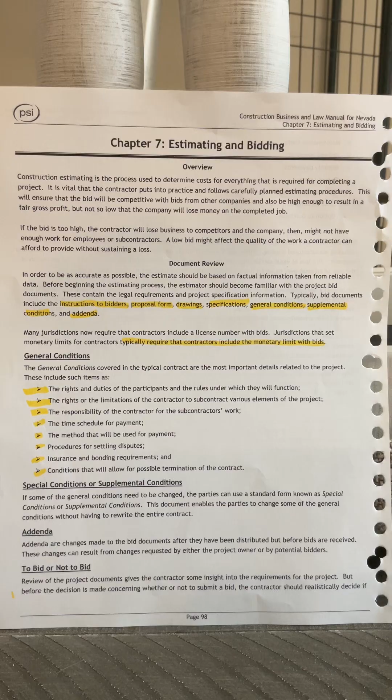To bid or not to bid. Review of the project documents gives the contractor some insight into requirements for the project, but before deciding whether or not to submit a bid, the contractor should realistically decide if the project would be profitable for the company.

To make this decision, the contractor needs to check that the size and complexity of the project is within the range of the company's experience and capabilities, that the project is compatible with the type of work the company typically does, and that the company has available resources, funds, equipment, subcontractors, material, and personnel to complete the project within the time frame noted in the documents.

If these requirements could be met, then the contractor, or designated estimator, would proceed with the estimating process.

Estimating procedures. Forecasting accurate costs for all of a project's requirements is, at best, a time-consuming and imperfect task. The contractor should establish a system for the company in which the same procedures are followed for each estimate. Having this system in place gives the estimator more confidence that nothing in the estimate has been overlooked or figured incorrectly.

Technology is helping increase the accuracy of the estimating process with specialized software programs for estimators, along with standardized national and regional cost indexes. Bid documents, including drawings and project specifications, are typically organized in accordance with the industry standard CSI format.

CSI format offers contractors an accepted method for organizing their estimates and bid tabulations. It is often used for job cost coding to provide an easy and functional transition of the bid estimate to the working project budget.

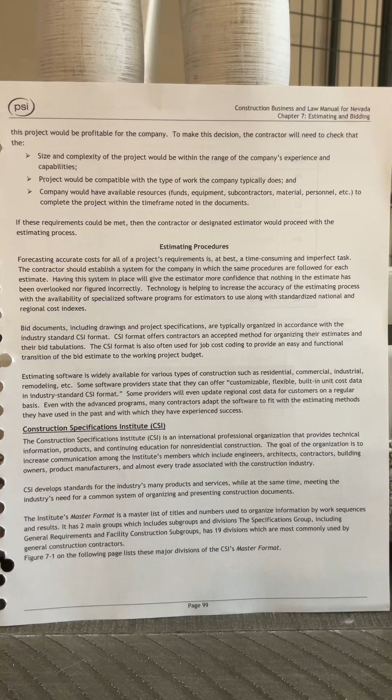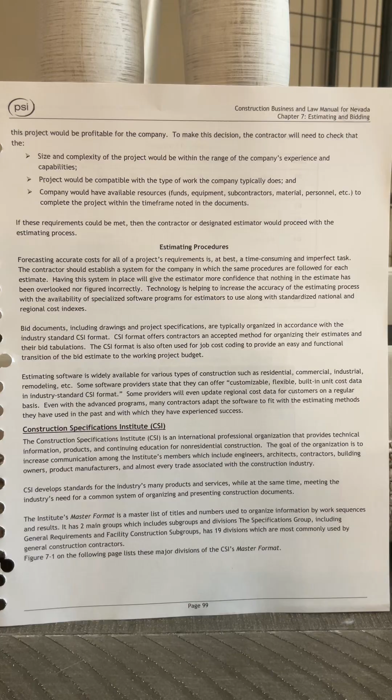CSI develops standards for the industry's many products and services, while also meeting the industry's need for a common system of organizing and presenting construction documents. The Institute's master format is a master list of titles and numbers used to organize information by work sequences and results. It has two main groups, which include subgroups and divisions. The specification group, including general requirements and facility construction subgroups, has 19 divisions commonly used by general construction contractors. Figure 7.1 on the following page lists these major divisions of the CSI's master format.

Figure 7.1, CSI Master Format Specification Group, General Requirements and Facility Construction Subgroups, 19 divisions. Code Division.

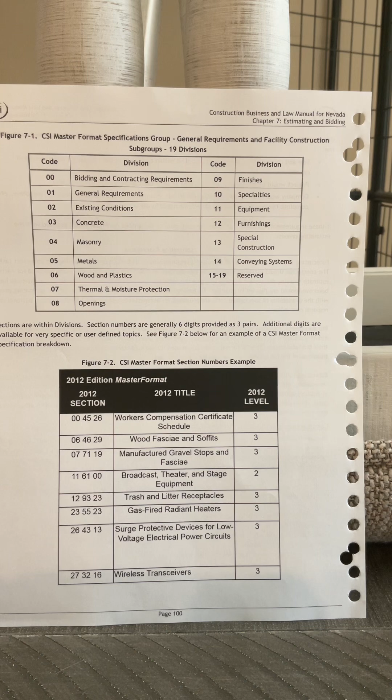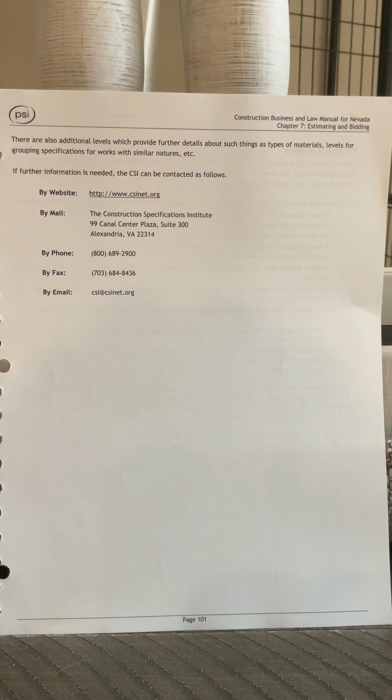Sections are within divisions. Section numbers are generally 6 digits, provided as 3 pairs. Additional digits are available for very specific or user-defined topics. See Figure 7.2 below for an example of a CSI master format specification breakdown. There are also additional levels which provide further details about such things as types of materials and levels for grouping specifications of a similar nature.

If further information is needed, the CSI can be contacted as follows. By website, http://www.csinet.org. By mail, the Construction Specifications Institute, 99 Canal Center Plaza, Suite 300, Alexandria, Virginia, 22314. By phone, 800-689-2900. By email, csi@csinet.org.

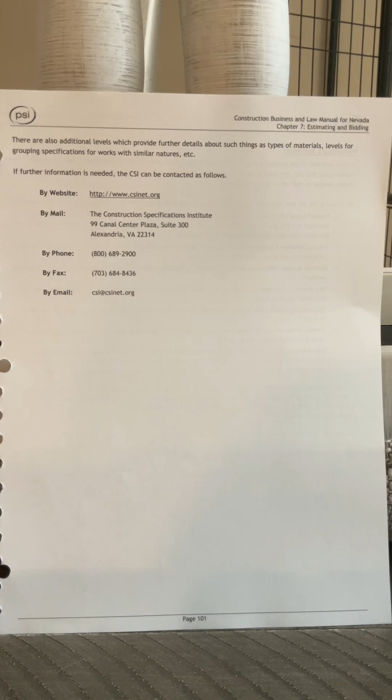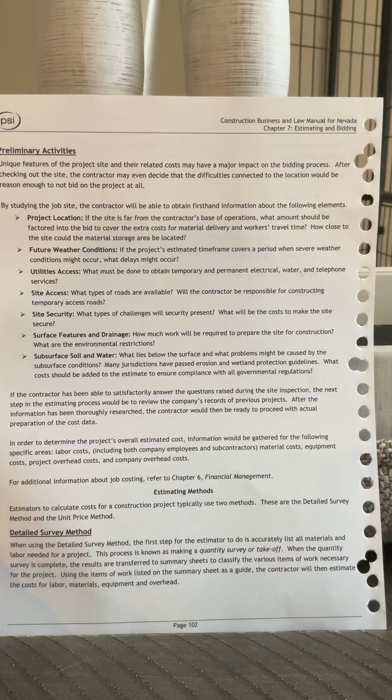Preliminary activities. Unique features of the project site and their related costs may have a major impact on the bidding process. After checking out the site, the contractor may even decide that the difficulties connected to the location would be reason enough to not bid on the project at all. By studying the job site, the contractor will be able to obtain first-hand information about the following elements.

Project location: if the site is far from the contractor's base of operations, what amount should be factored into the bid to cover the extra costs for materials, delivery, and workers' travel time? How close to the site could the material storage area be located?

Future weather conditions: if the project's estimated time frame covers a period when severe weather conditions might occur, what delays might occur? Utilities access: what must be done to obtain temporary and permanent electrical, water, and telephone services? Site access: what types of roads are available? Will the contractor be responsible for constructing temporary access roads? Site security: what types of challenges will security present? What will be the cost of making the site secure?

Surface features and drainage: how much work will be required to prepare the site for construction? What are the environmental restrictions? Subsurface soil and water: what lies below the surface, and what problems might be caused by the subsurface conditions? Many jurisdictions have passed erosion and wetland protection guidelines. What costs should be added to the estimate to ensure compliance with all governmental regulations?

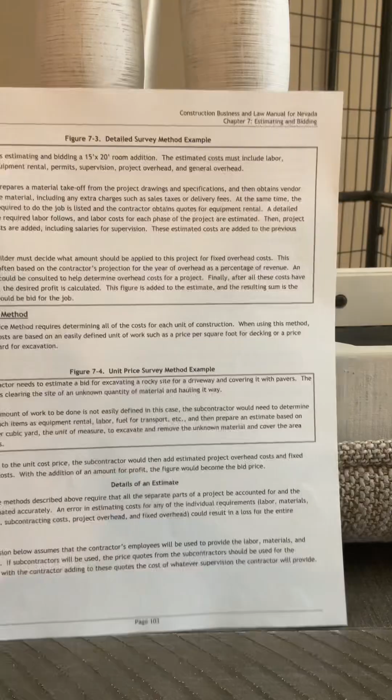Figure 7.3, detailed survey method example.

A contractor is estimating and bidding a 15 by 20 room addition. The estimated cost must include labor, materials, equipment rental, permits, supervision, project overhead, and general overhead.

The builder prepares a material takeoff from the project drawings and specifications, then obtains vendor quotes for the material, including any extra charges such as sales taxes or delivery fees. At the same time, the equipment required to do the job is listed, and the contractor obtains quotes for equipment rental.

A detailed review of the required labor follows, and labor costs for each phase of the project are estimated. Then project overhead costs are added, including salaries for supervision. These estimated costs are added to the previous amount.

Next, the builder must decide what amount should be applied to this project for fixed overhead costs. This estimate is often based on the contractor's projection for the year of overhead as a percentage of revenue. An accountant could be consulted to help determine overhead costs for a project.

Finally, after all these costs have been added, the desired profit is calculated. The figure is added to the estimate, and the resulting sum is the price that would be bid for the job. Unit price method: this method requires determining all of the costs for each unit of construction.

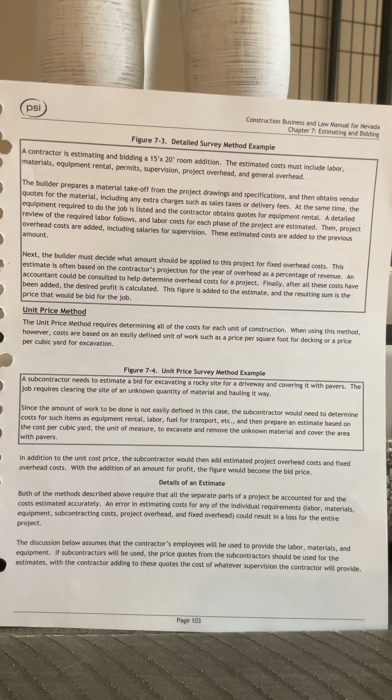The discussion below assumes that the contractor's employees will be used to provide the labor, materials, and equipment. If subcontractors will be used, the price quotes from subcontractors should be used for the estimates, with the contractor adding to these quotes the costs of whatever supervision the contractor will provide.

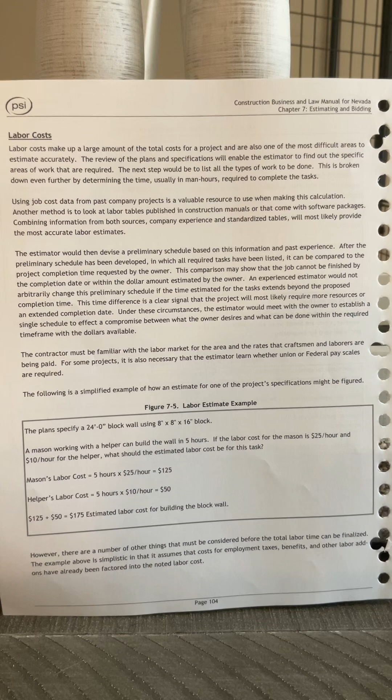Labor costs. Labor costs make up a large amount of the total cost of a project and are also one of the most difficult areas to estimate accurately.

The review of the plans and specifications will enable the estimator to find out the specific areas of work that are required. The next step would be to list all the types of work to be done. This is broken down even further by determining the time, usually in man-hours, required to complete the tasks.

Using job cost data from past company projects is a valuable resource to use when making this calculation. Another method is to look at labor tables published in construction manuals or that come with software packages, combining information from both sources. Company experience and standardized tables will most likely provide the most accurate labor estimates.

The estimator would then devise a preliminary schedule based on this information and past experience. After the preliminary schedule has been developed, in which all required tasks have been listed, it can be compared to the project completion time requested by the owner.

This comparison may show that the job cannot be finished by the completion date or within the dollar amount estimated by the owner. An experienced estimator would not arbitrarily change this preliminary schedule if the time estimated for the tasks extends beyond the proposed completion time. This time difference is a clear signal that the project will most likely require...

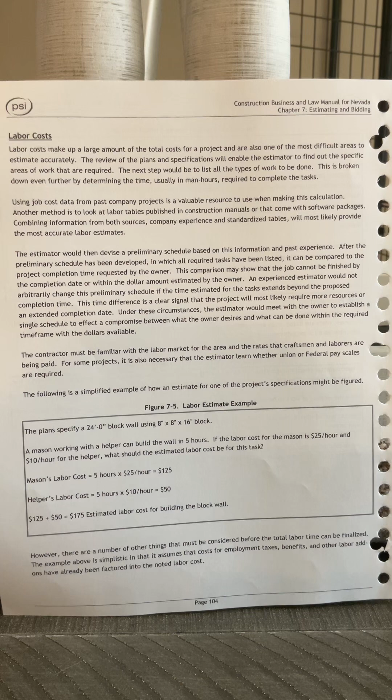The contractor must be familiar with the labor market for the area and the rates that craftsmen and laborers are being paid. For some projects, it is also necessary that the estimator learn whether union or federal pay scales are required. The following is a simplified example of how an estimate for one of the project specifications might be figured.

Figure 7-5, labor estimate example.

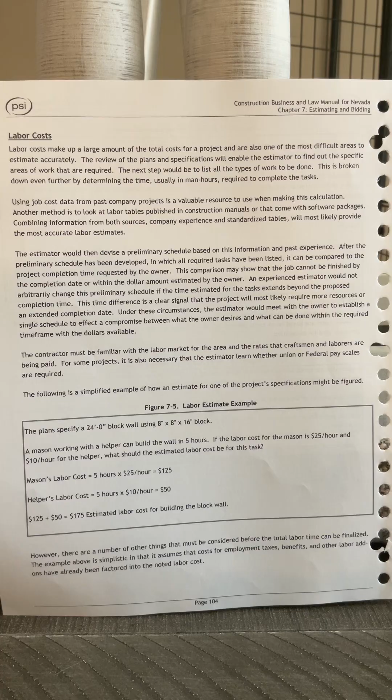The plans specify a 24-foot block wall using 8 by 8 by 16 block. A mason working with a helper can build the wall in 5 hours. If the labor cost for the mason is $25 an hour and $10 an hour for the helper, what should the estimated labor cost be for this task?

Mason labor's cost $125. Helper's labor cost $50. That's $175 estimated labor cost for building the block wall.

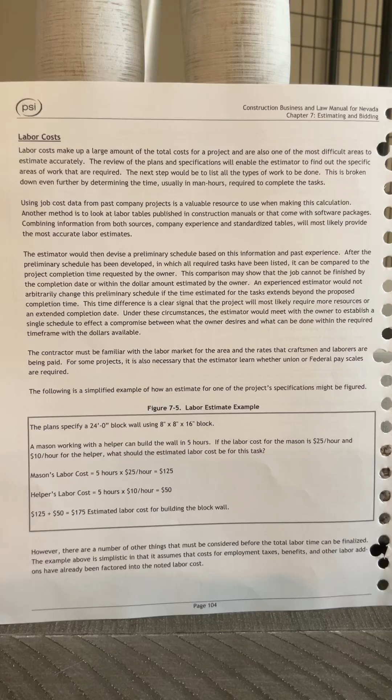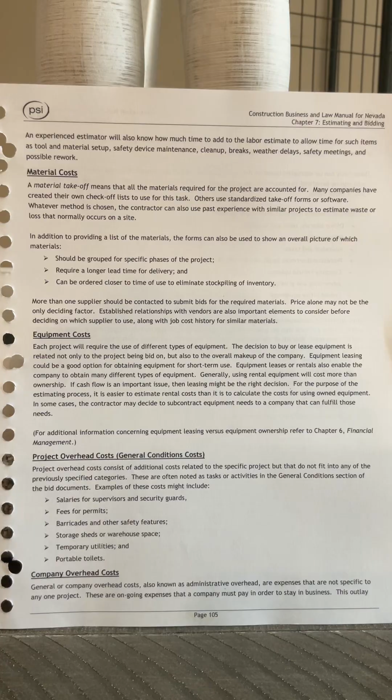However, there are a number of other things that must be considered before the total labor time can be finalized. The example above is simplistic in that it assumes that costs for employment taxes, benefits, and other labor add-ons have already been factored into the noted labor cost. An experienced estimator will also know how much time to add to the labor estimate to allow for items such as tool and material setup, safety device maintenance, cleanup, breaks, weather delays, safety meetings, and possible rework.

Material costs. A material takeoff means that all the materials required for the project are accounted for. Many companies have created their own checkoff lists to use for this task. Others use standardized takeoff forms or software. Whatever method is chosen, the contractor can also use past experience with similar projects to estimate waste or loss that normally occurs on a site.

In addition to providing a list of the materials, the forms can also be used to show an overall picture of how materials should be grouped for specific phases of the project, which require a longer lead time for delivery, and which can be ordered closer to time of use to eliminate stockpiling of inventory.

More than one supplier should be contacted to submit bids for the required materials. Price alone may not be the only deciding factor. Established relationships with vendors are also important elements to consider before deciding on which supplier to use, along with job cost history for similar materials.

Equipment costs. Each project will require the use of different types of equipment. The decision to buy or lease equipment is related not only to the project being bid on, but also to the overall makeup of the company.

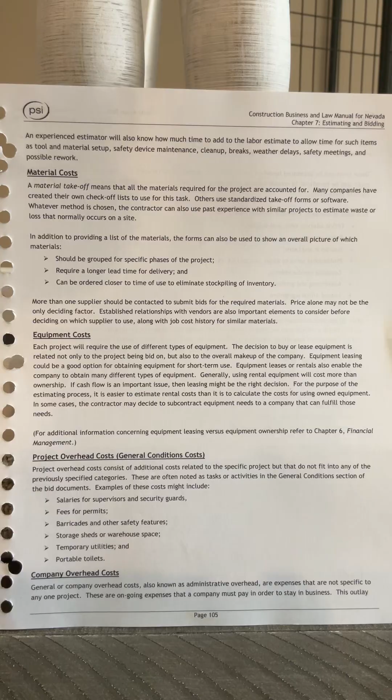Company overhead costs. General or company overhead costs, also known as administrative overhead, are expenses that are not specific to any one project. These are ongoing expenses that a company must pay in order to stay in business. This outlay must be accounted for whether work is being done on a project or not.

But when each project is estimated, these are costs that must be included in the overall bid. These costs can be estimated based on the historical or projected percentage of a company's overhead to revenue. It could also be beneficial to consult with an accountant to obtain professional advice about how to estimate the cost of these items.

Examples of company overhead costs might include office salaries, rent, supplies, office utilities, insurance and taxes, professional services, legal and accounting, etc., company vehicle upkeep, advertising and printing, and leased office equipment.

Profit markup. After all the cost estimates have been completed and added, then a percentage of that total amount is added as profit. This is a critical step because no company can remain in business for any length of time without making a profit. Contractors may adjust markup to compensate for the type of client, contingencies, or unknown factors. Following are some items a contractor should consider before deciding on the amount of markup.

Size and type of the project, distance of the site from the company's base, problems with the site, environmental restrictions, competition bidding on the project, economic conditions of the area, and use of in-house employees or subcontractors.

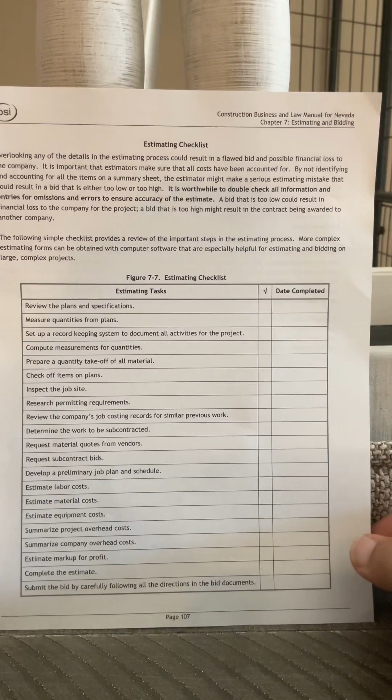Estimating checklist. Overlooking any of the details in the estimating process could result in a flawed bid and possible financial loss to the company. It is important that estimators make sure all costs have been accounted for. By not identifying and accounting for all the items on the summary sheet, the estimator might make a serious estimating mistake that could result in a bid that is either too low or too high. It is worthwhile to double check all information and entries for omissions and errors to ensure accuracy of the estimate.

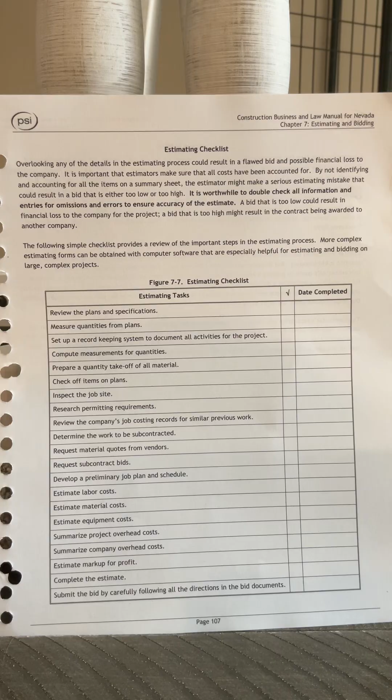A bid that is too low could result in financial loss to the company for the project. A bid that is too high might result in the contract being awarded to another company. The following simple checklist provides a review of the important steps in the estimating process. More complex estimating forms can be obtained with computer software, especially helpful for estimating and bidding on large complex projects. Figure 7-7, estimating checklist, with dates completed.

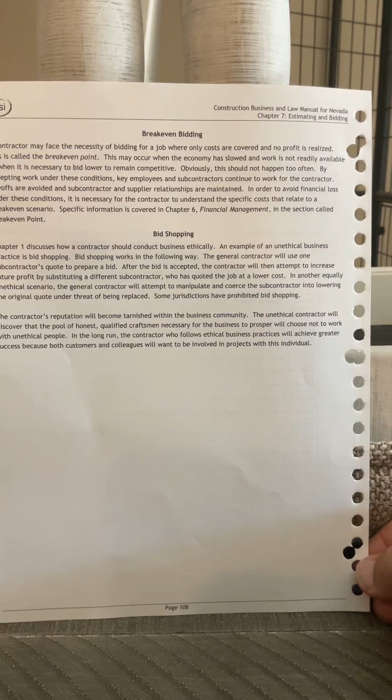Break-even bidding. A contractor may face the necessity of bidding for a job where only costs are covered and no profit is realized. This is called the break-even point. This may occur when the economy has slowed and work is not readily available, or when it is necessary to bid lower to remain competitive. Obviously, this should not happen too often.

By accepting work under these conditions, key employees and subcontractors continue to work for the contractor. Layoffs are avoided and subcontractor and supplier relationships are maintained. In order to avoid financial loss under these conditions, it is necessary for the contractor to understand the specific costs that relate to a break-even scenario. Specific information is covered in Chapter 6, Financial Management, in the section called Break-Even Point.

Bid shopping. As you'll remember, Chapter 1 discusses how a contractor should conduct business ethically. An example of an unethical business practice is bid shopping. Bid shopping works in the following ways. A general contractor will use one subcontractor's quote to prepare a bid. After the bid is accepted, the contractor will then attempt to increase future profit by substituting a different subcontractor who has quoted the job at a lower cost.

In another equally unethical scenario, the general contractor will attempt to manipulate and coerce the subcontractor into lowering the original quote under threat of being replaced. Some jurisdictions have prohibited bid shopping. The contractor's reputation will become tarnished within the business community. The unethical contractor will discover that the pool of honest, qualified craftsmen necessary for the business to prosper will choose not to work with unethical people.

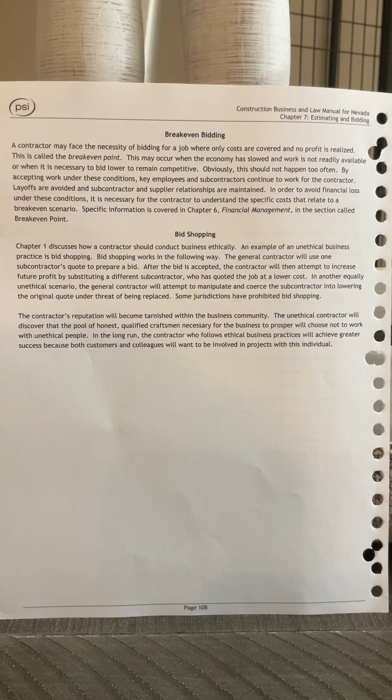The word will get around that if for some reason your employee is injured and you don't manage it appropriately, or if you terminated an employee for unjust cause, like a relational issue with a different employee, or if there's any discrimination involved with supervision and you overlook it and get rid of the underemployee just to keep your supervision position, it's unethical. There needs to be proper discipline, standards in place, and expectations for everybody need to be equal.